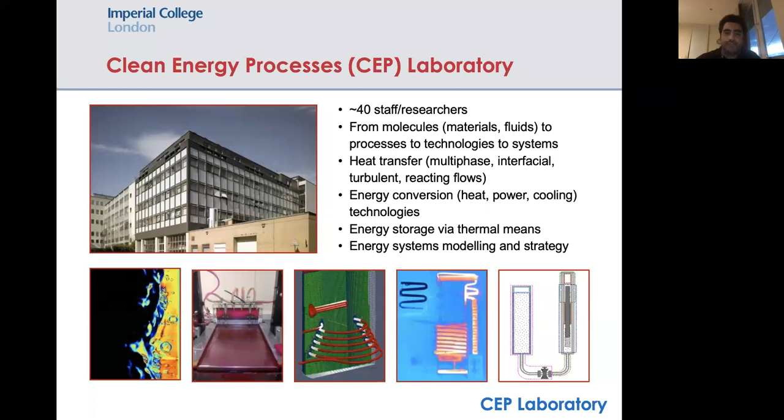So we look at technologies, but their performance is governed by the processes happening within them. You need to understand the fundamentals if you want to design better technologies. And technologies sit inside systems, interfacing with users who want things from them. You can never really understand the true potential of a technology unless you put it in its application and see how it operates within the system. So we need to talk across scales, to people doing fundamentals, and to people looking at policy and how technologies are used by people within systems.

So our group, the CEP laboratory, has a number of divisions, as you can imagine, because we cover a lot of ground. As I said, we go from processes. We have people who look at mass transfer processes and intensification enhancement. We look at multi-phase flows because you have boiling and condensation of different fluids inside the processes we care about, all the way to the energy division, which looks at technologies and systems.

Today I'm really just talking about things happening inside the energy technology part of the group. There are, of course, many other things I don't have time to go into, but that's where this talk sits. So I always start these discussions in solar energy by showing two slides, and I use this term, the cost delusion.

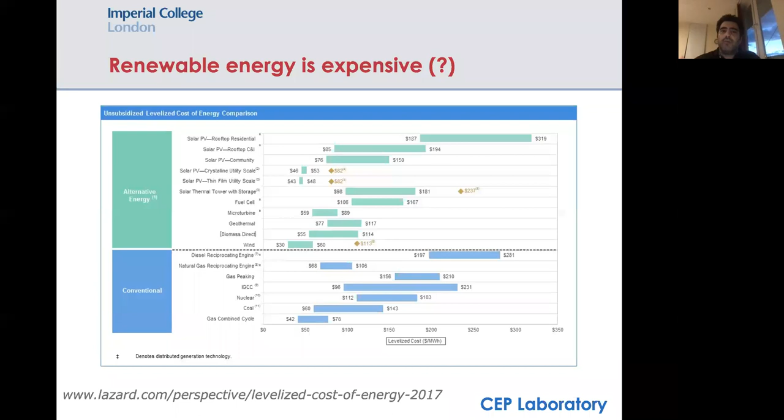And I challenge you to look at the chart and tell me that the green costs are fundamentally much higher than the blue costs. This is no longer true. This is not a true statement, and the evidence is everywhere you look that nowadays the cost of renewables is basically so low that it's competitive with fossil fuel plants. It doesn't mean this is true everywhere, but if you're in the right place, you can see this picture.

Now, it's not that the people saying renewables are expensive are lying — of course they're not lying. It's just that things have changed so quickly.

I don't need to convince you, you just need to look at the plots. That's exactly what explains this seeming contradiction — some people might say renewables are very expensive, and the answer is yes, they were, but not anymore.

Now, when we say solar, what do we mean? There are two types of solar, shown here on the right-hand side. You can have something called concentrated solar power, which is basically mirrors focusing sunlight.

And then you drive a power cycle to generate electricity. The power cycle is a conventional steam power plant, just like you have with coal. And then there's photovoltaics, which is very different. In photovoltaics, you're not boiling anything and running it through a turbine. So these are two very, very different technologies.

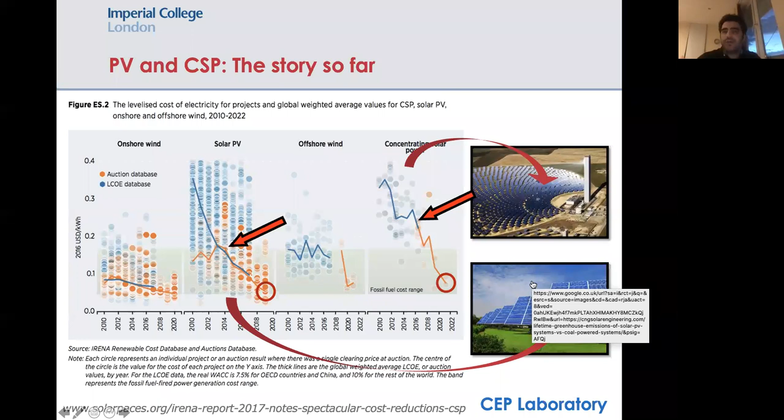Now I want to focus a little on technologies, especially solar technologies. Depending on the concentrating technology, you can have very high temperatures—if you concentrate a lot, you can reach 1,000 degrees. Or you can have very low concentration systems, like a conventional solar thermal system in your home, where you're not generating 1,000 degrees—just maximum 100 degrees to heat up some water. So there's a huge scale of temperatures you can have.

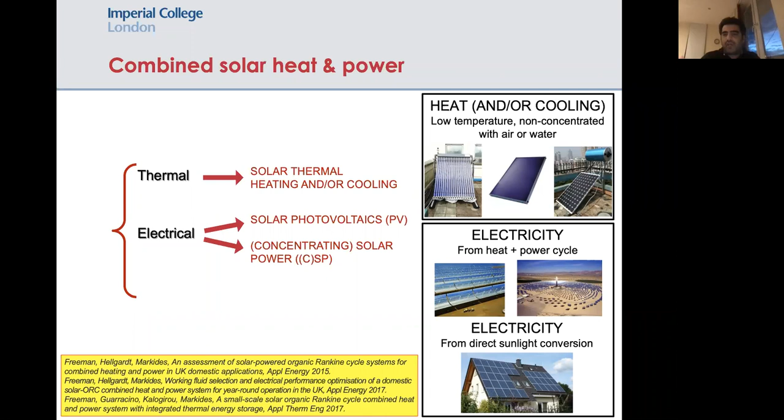But the real question is, can we have a system where these two functions, these two energy vectors, the thermal output and the electrical output, are coming from the same system?

Yes, and there are a number of options. One option is on the top right-hand side, another is on the bottom right-hand side. One option is taking a solar thermal collector like this one, where you can generate heat at a relatively high temperature - by relatively, I don't mean 1,000 degrees, I mean even 100, 200 degrees.

You can use this heat to drive a thermodynamic power cycle, which generates electricity, but it also rejects heat. This is what happens with all power cycles. If you go to any power station, you'll find it has a chimney - well, not really a chimney, there's a separate chimney for exhaust gases, but it has this other cooling tower.

You can see some steam going up - that's the cooling part. You need to cool a power station, so you always reject some heat. So really what you're doing is you have this dual output from the same plant: you can provide heat and you can provide electricity.

But you can also have something called hybrid PV thermal collectors. These hybrid PV thermal collectors are similar to PV collectors, but what you do is extract not just the electricity from the collector, but also some heat. My talk today is really about this - about PVT collectors.

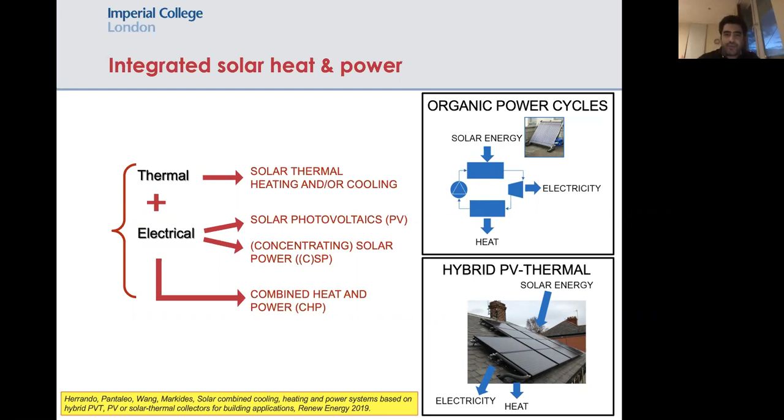Now let's talk about the point of this PVT, not just PV, collectors. One thing you need to know about PV technology is that if you have a cell in an environment on a nice sunny, hot day, that cell is going to get very hot too. If you put something in the sun, it heats up. And we know that the efficiency of PV cells drops as the temperature increases.

So on a really nice sunny day, you put your panel on the roof thinking you're going to get all this power - and you do get a lot of power, but you have a massive loss because it's quickly going to heat up. When the manufacturer rates a panel and says it's X watts, really what they're telling you is how much power it generates at 25 degrees. If you're operating at 65 or 75 degrees instead, which is possible on a very sunny day, you can have a huge loss in efficiency of that panel.

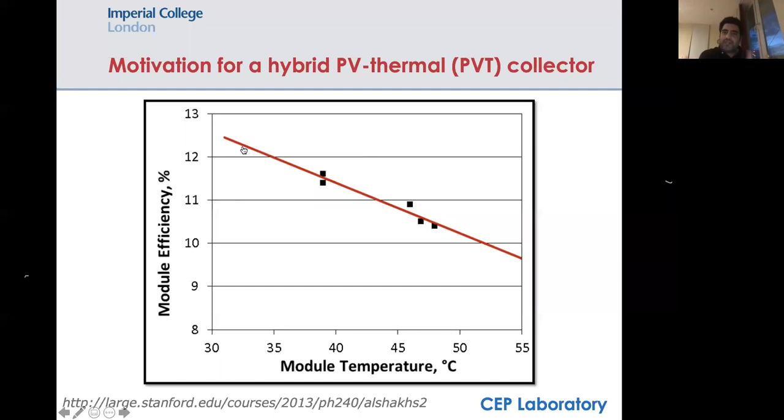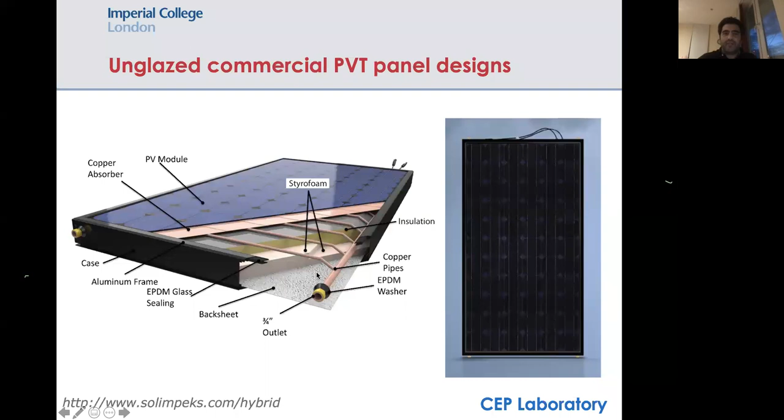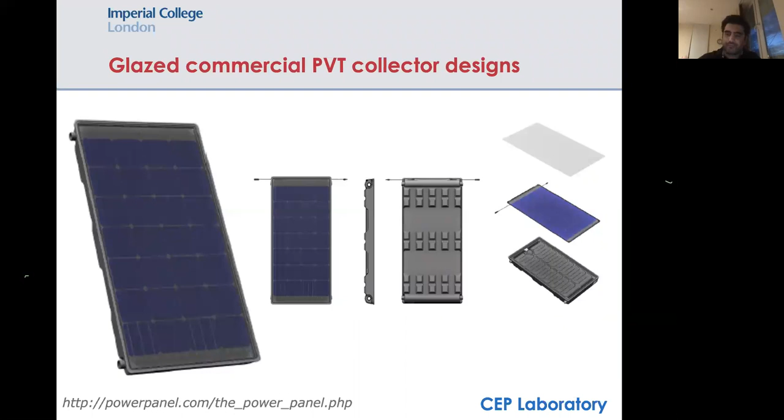It's actually quite simple for me to explain. Effectively what happens is, if you want something which is very good in terms of its thermal performance, you want to try to trap as much heat into the collector as possible. But the more heat you trap, the more you're penalizing your electrical efficiency, because the hotter something gets, the worse its electrical performance is from the PV side. So you always end up with this trade-off where you can't get both. You can't be both thermally good and electrically good.

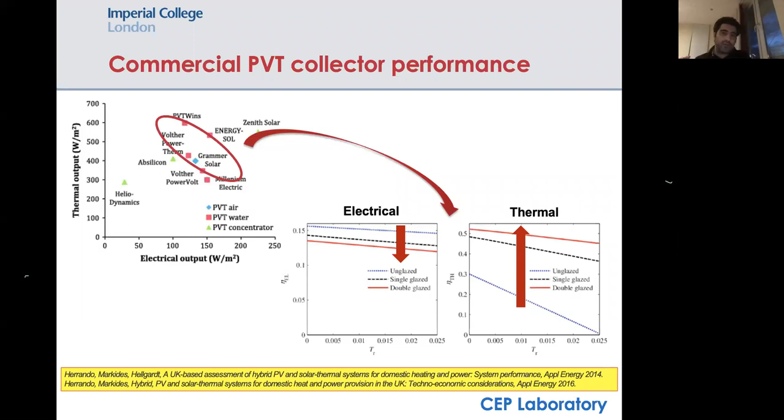You can say, well, okay, I can sacrifice a little bit of my thermal efficiency because I really want to be electrically efficient, or vice versa. You can sacrifice a little bit of my electrical efficiency because I want to be really thermally efficient, but you can't have both. And of course, that begs the question.

What's the point of all of this? With electricity, the temperature doesn't really matter, but with heat, it really does matter. So if you are thermally efficient, what you're able to do is generate high temperatures without losses. So this means that you have a more useful ability to do more things the higher the temperature that you have in your output.

So let's now think about what we've just said: how can we build a high performance collector? In some sense, how can we think about this problem of getting high electrical efficiency and high thermal efficiency? Well, high efficiency really means low loss, because basically the efficiency is the useful output from your collector, which means the less you lose from the collector, the more useful output you're going to have. So we can think about basically minimizing heat losses.

And what are those heat losses? Well, there are two mechanisms of heat transfer in a PVT collector, in fact any collector: one is through radiation, and one is through convection. So you lose heat radiatively, and you can lose heat by convection to the air sitting above your collector. If your collector gets hot, thermal plumes are going to rise and remove heat, and also it's going to radiate heat.

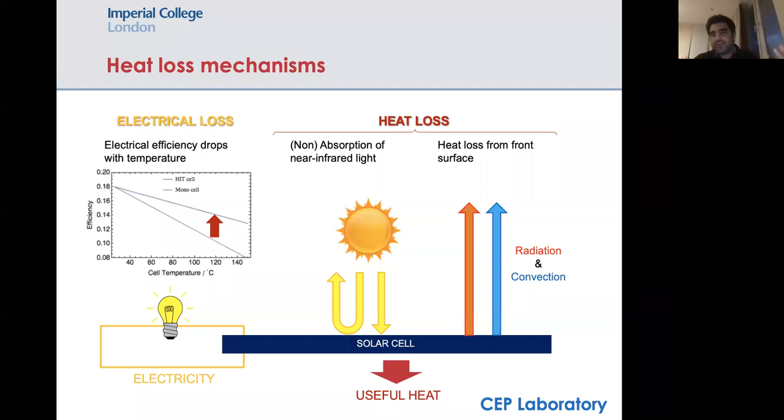And of course, the question then is: if I identify those heat losses, can I reduce them? And if I reduce them, won't my efficiency go up? Yes, of course, that's exactly what we try to do. So we have these two mechanisms, we can lose heat by convection, we can lose heat by radiation. How can we reduce those vectors of lost energy? How can we suppress these heat losses?

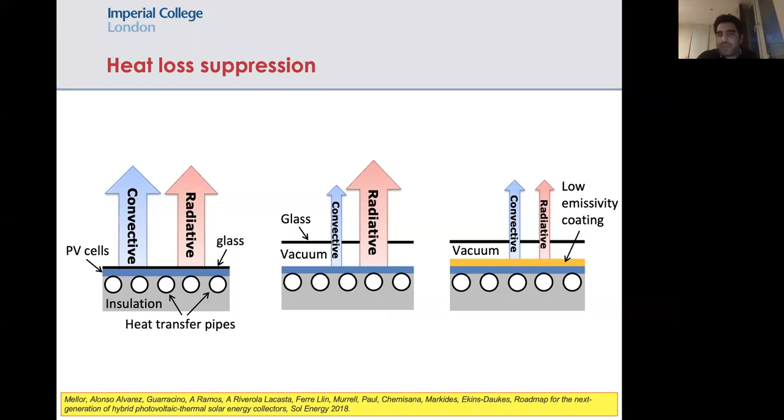Well, of course, you can put a glazing layer here and pull a vacuum. That reduces convective losses, because convection is very weak inside a vacuum. It doesn't cut the radiation down, but it cuts the convection down. And is there anything we can do about radiation? Well, yes, because radiation is a function of the emissivity of a material. So if we find a material or a coating that has a low emissivity, then we can also suppress the radiation from the surface.

And so we've been looking at exactly this: how can we coat PV panels with materials that can suppress losses. It's a little bit more complicated than I said, because in reality, what you want to do is absorb the sunlight and suppress losses, which introduces a bit of complexity in terms of exactly what you're trying to do to the emissivity.

I don't have time to go into the details, but the main lesson from this slide is that if we select a suitable coating, we're able to optimize the radiative performance of our collector and trap as much sunlight as we can, and stop some of the radiation, which allows us to increase the efficiency of the collector.

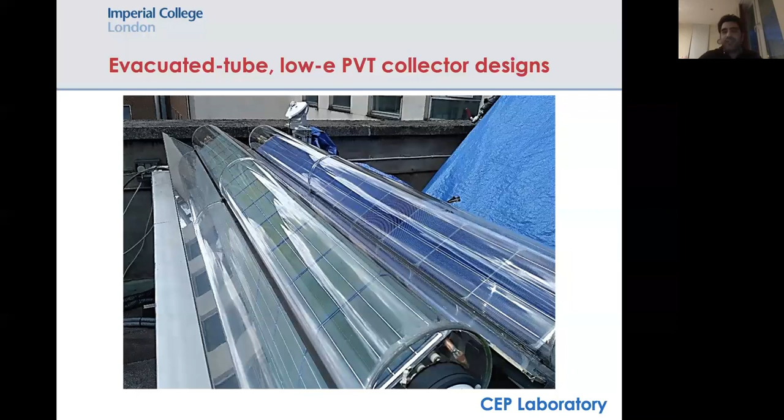That's because on the left, we've added a coating, which is a low emissivity coating, to suppress the radiation from the tube on the left-hand side. So this is a specific engineering design or solution to improving efficiency.

Now, so far I've basically been focusing on collectors which I call conventional collectors, similar to what I showed you before. You have a PV cell, and behind the PV cell you have some kind of fluid, and the fluid is flowing as a coolant, pulling out heat from the cell and reducing the cell's temperature.

But there's another very interesting type of solution, a bit newer than what I described before, called spectral splitting. Spectral splitting relies on the fact that PV cells are not sensitive, so cannot convert all of the sunlight to useful electricity. They can only convert part of it.

And anything higher, what's going to happen to it? Is it not going to be absorbed? Of course it's going to be absorbed. It's going to heat up the cell, but it's not going to be converted to electricity. So the real motivation here is, why would you want to send that part of the sunlight to the cell in the first place? All it's going to do is heat it up.

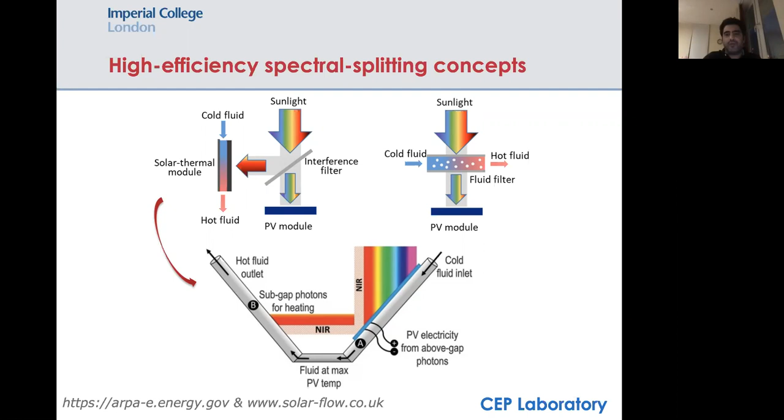So that the not-useful part just gets sent away from the cell to become heat, and only the useful part gets sent to the cell to be converted to electricity. That way we're heating up the cell less. This is one way to generate both electricity and heat with a higher efficiency than if you sent everything to the cell in the first place.

So in terms of technology development, how do we proceed? How do we go from having a nice concept, where maybe we can do this or maybe we can do that, to an actual system where we say this is so much better than something else? Well, we start at the smallest unit. We start from the cell.

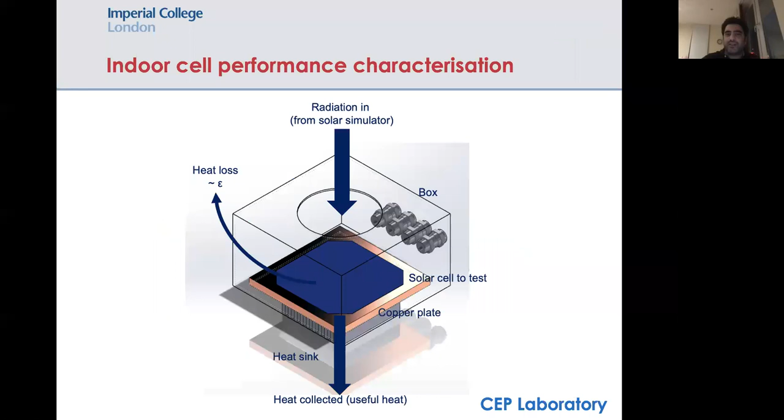We have a cell. Maybe we have an idea about how to coat this cell with a new material, so we can characterize the cell performance itself, and we can say, for example, okay, we can now modify the emissivity of this cell.

We can then take those cells and put them on a PVT collector. Initially, we always do tests indoors in something called a solar simulator. You don't take something and go straight outdoors because there are too many variables. A solar simulator is an instrument that gives you a very well-defined and constant solar spectrum that you can then check your particular design on.

And here we can verify, for example, that we can gain in efficiency without necessarily having electrical losses, so electricity losses.

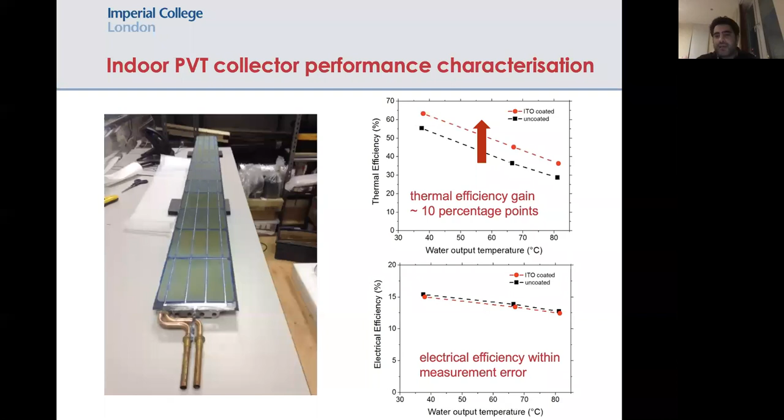Now, in this type of design, you have multiple approaches, and we do both. You attack it from a modeling perspective, so you start modeling things in 3D, dynamic models. We use things like COMSOL and other types of modeling tools to design our collectors and to optimize them. There are different types of designs you can imagine.

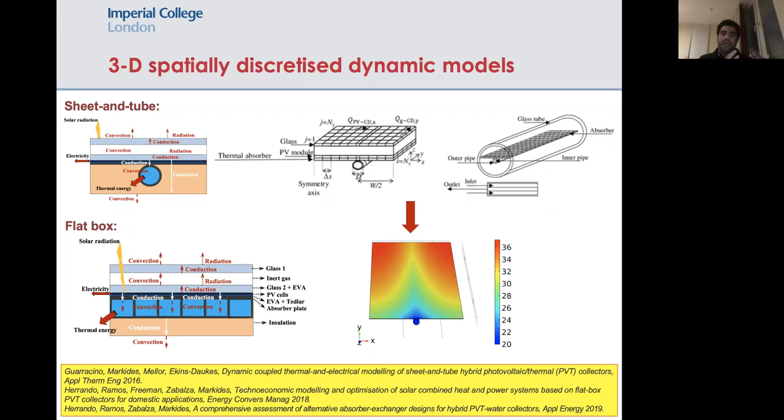This is called a sheet and tube design. This is called a flat box design. There are many, many different types of designs. But what I'm trying to say is, at the collector model, you can model it, number one, and simulate its performance.

And of course, then the final step is you need to go outdoors and do the actual testing. You're never going to convince someone if all you have is modeling, even if it's 3D and dynamic and up and down. We've chosen two particular climates to do tests at.

We have tests in London, which is representative of a northern climate, so small irradiance, low temperatures. And Limassol, which is basically where I come from, not that far away from Saudi Arabia actually. So very hot, sunny, 40, 45 degrees in the summer and quite sunny.

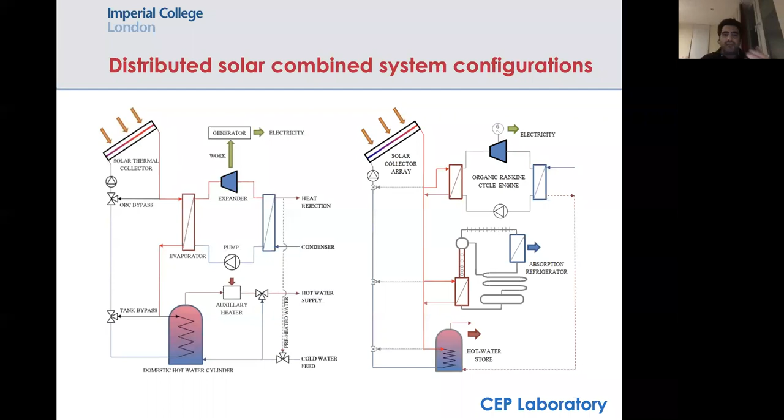This is a bit more of a generic picture. You could have whole control systems, where in some applications the electricity price varies from time to time. So you can have dynamic controllers that store solar energy at a time when the electricity price is cheap, and then as soon as electricity becomes very expensive, you don't want to import it from the grid because you're paying a lot of money. So you delay the generation of electricity to a later time when electricity is expensive. You have all these complicated systems with multiple control issues that respond to the weather, respond to price signals, and ultimately deliver useful energy vectors to some end user.

We've looked at things like, how would you design these systems for different households and different weather conditions? Going to different countries, you don't only have different weather conditions, but different demands for energy. If I go to Finland, they don't need a lot of cooling, but they need space heating. If I go to Saudi Arabia, they don't need a lot of heating, but they need a lot of cooling. So depending on where you are, it's not just the solar irradiance that changes, but also the demands of the end users. So it's interesting to look at how these systems would perform in different climates.

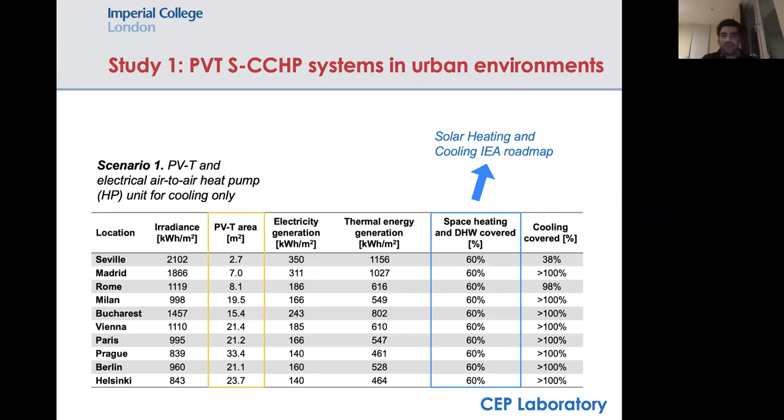We've done a lot of studies. This was a study where we focused on the European Union, going all the way from Helsinki down to Seville — very different weather conditions — trying to find, given a certain fraction of some roof of some household that you fill, what fraction of the energy demand of that household can you cover? So you can cover 60% of this, 30% of that, 100% of the cooling, or whatever.

You can go to slightly bigger systems. You can say, okay, I'm not just interested in homes, but I could go to commercial or larger community systems. Here we have, how can we heat a swimming pool and generate electricity to run the pumps and everything?

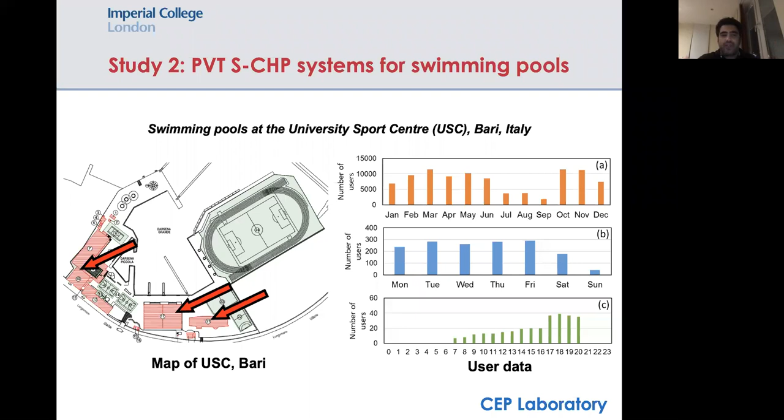In a sports center in Bari, we got the drawings and the energy demands from the sports center, and we tried to figure out, if we cover the available area, what is our capacity to cover the demands for heating and cooling for the indoor swimming pool and outdoor swimming pool, and so on.

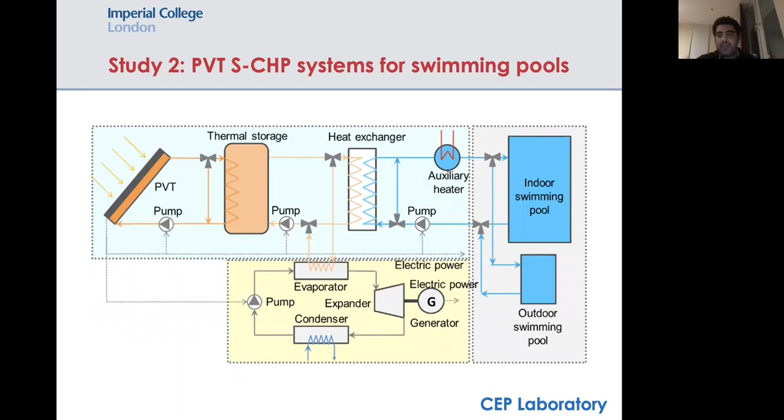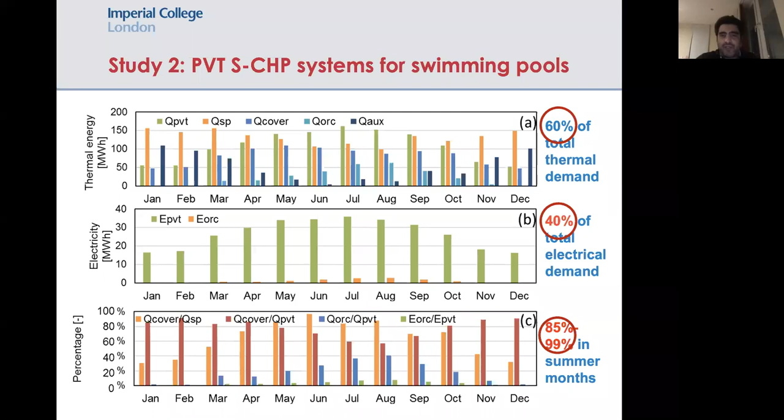You can run simulations over the course of a whole year, time varying simulations, since the weather is changing day to day. You can find, for example, of all the heat I require over the year for my swimming pool, I can cover 60% by installing this system over the available roof space. I can't get any more because I don't have more area available, but I can get less. Equivalently, how much of the electricity that I'm consuming can I cover, and how much of the other vectors, which I don't have time to get into, can I generate from this system?

I spoke very briefly about spectral splitting systems. Study 1 and 2 was really more conventional systems. Here we start asking, what would be the potential of a spectral splitting system in this type of larger scale, semi-industrial application?

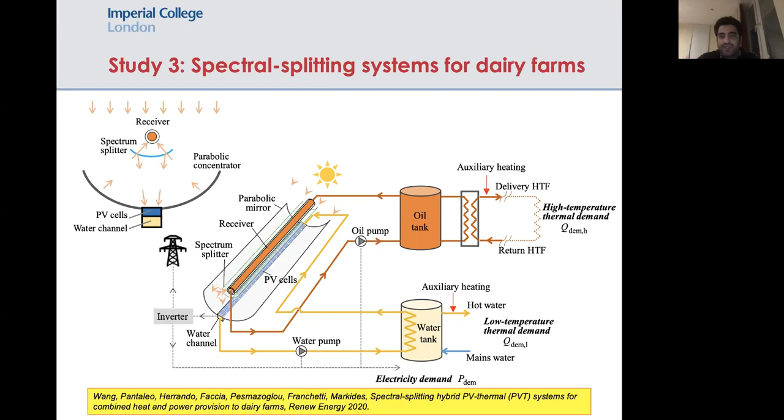Here we have a dairy farm. In dairy farms, there's a lot of demand for medium temperature heat, and of course a lot of electricity as well. So here's us designing a system and trying to say, if you install a certain area in a dairy farm, what fraction of different types of demands can we cover? You can come up with some fraction of the demand for that particular case study we were looking at, and these are significant reductions.

What this really means for an end user is that if you were generating steam, let's say by burning oil, you're now burning 80% less oil. So only 20% of what it was before, and so on, of course at a cost.

So all of this has to come together economically as well, and this is what this is showing. Unfortunately, I don't have time to go into all the details, but I wanted to give you a flavor that we need to consider cost, and there are many different types of cost and economic indicators that we consider.

So here we have something called a payback time, which is how long it takes before this system pays back the investment. You can see that if you design it carefully, and this parameter, which I don't have time to get into, is quite small, then you can have payback times of 12 years. But if something is very expensive, it could go right above 25 years. That's an important economic indicator, payback time.

But there's also something called a levelized cost of energy, and again, you want this levelized cost to be as low as possible.

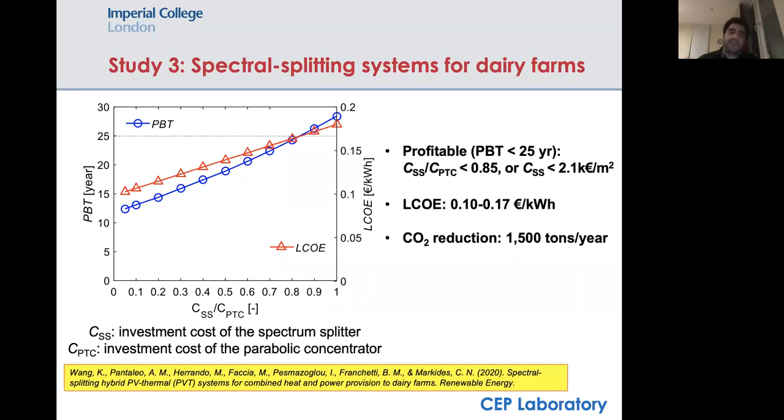We can then have even more complicated systems, just to give you a flavor, because before we were talking about solar energy, but there was only a solar energy input. That's not necessary. You might have a hybrid renewable energy system where you have sunlight, but you also have a wind turbine as part of this grid, and also a biomass boiler, so you can get heat from your biomass boiler. Biomass is a renewable source of heat, and wind and solar are both renewable forms of energy. So you can start balancing the different parts of the system to generate electricity or heat, and this can be many very complicated systems.

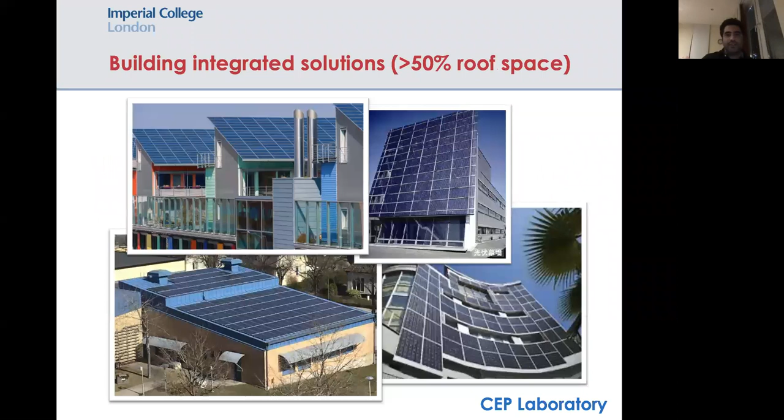Now, we spoke a lot about heat and electricity. I want to talk a little bit about cooling, and a technology we're looking at called the diffusion absorption refrigerator. This is the technology we won the chill challenge with. It's basically a way to go directly from solar energy, from a heat source, to generating a cooling effect. What's interesting is that there's no electricity consumption in the system, so this isn't like a vapor compression system where you have a compressor, an air conditioning system plugged into the grid pulling electricity to generate a cooling effect. This is generating cooling without any access to electricity.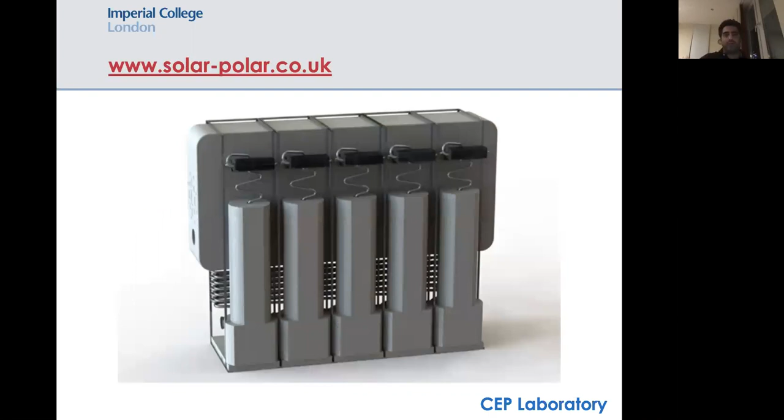You can see it here, what it looks like. We're working with a company called Solar Polar to develop this technology, and it's basically an off-grid cooling system. We're doing tests indoors, you can see here the DAR unit. It generates maybe up to about 100, at the moment maybe 100 to 200 watts of cooling per unit. You can of course put them modular and put a number of them in parallel, and during testing we can test for different conditions, how much cooling you can get, what's the COP, etc.

And here's some outdoor testing that we do. So indoor testing, remember, and then outdoor testing, so we can connect our DAR unit, in this case, to some evacuated tube collectors that supply heat to run this and give a cooling effect.

There are ways, and again I'm not going to go into details, similar to what I did here. Just like there are ways to take the heat generated by a PVT collector and convert that to cooling, there are also ways to take that heat and generate an additional amount of electricity. So if you have a PVT system that's generating electricity, but it's also generating heat, part of that heat can also become additional electricity, a secondary electricity. There are technologies that can generate electricity from lower temperature heat sources.

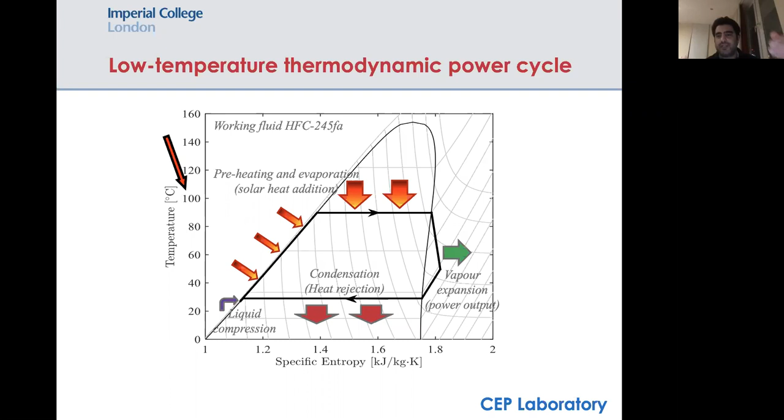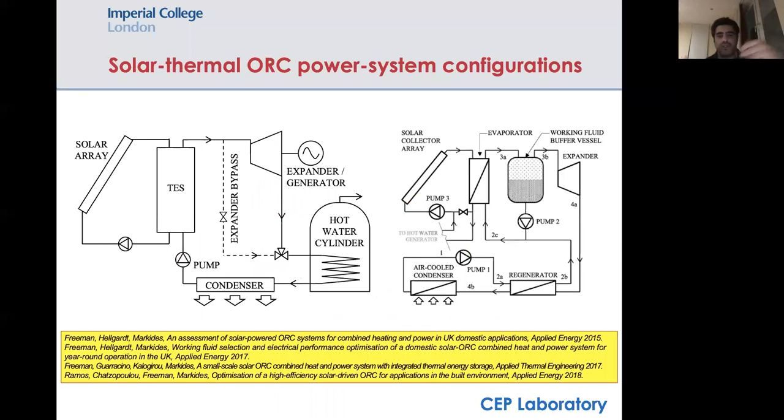There are many types of systems, again with storage, with thermal energy storage, you can connect it, and you can recover some of the heat as well for heat provision. It can get very complicated.

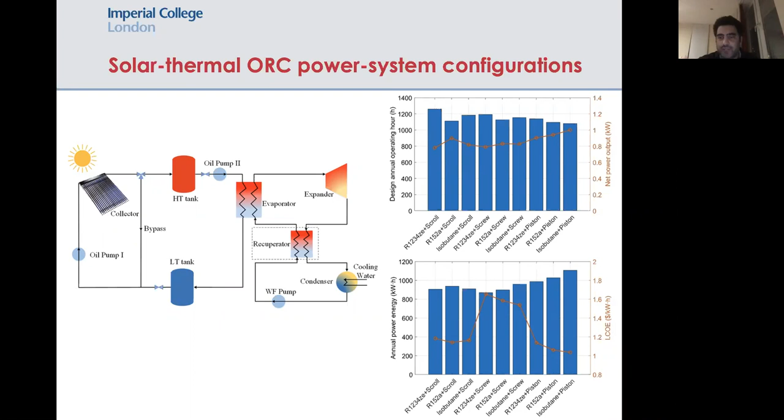There are things called solar ORC systems, where you take the heat from a thermal collector or a PV thermal collector, both have a thermal output, and you convert that to an amount of useful electricity. There's a cost associated with that, and we have to look at all of these things, like what is the potential, given a certain area, to generate some amount of electricity, is that useful, and at what cost does this come?

And of course, the final thing is control. So you don't just have a system that passively responds to the sun - the sun goes up, let's generate electricity, the sun goes down, let's not generate electricity. You can have control by which you have storage. During the day when electricity is cheap, you might want to be storing something. So you see what's happening here - this is our store and the energy that's being stored.

And during the day, we're storing the energy. And then at 5 p.m. - you know how the British love to have a cup of tea at 5 o'clock - everybody switches on the kettle at the same time. And what happens is that because everybody wants electricity at the same time, the price of electricity goes up.

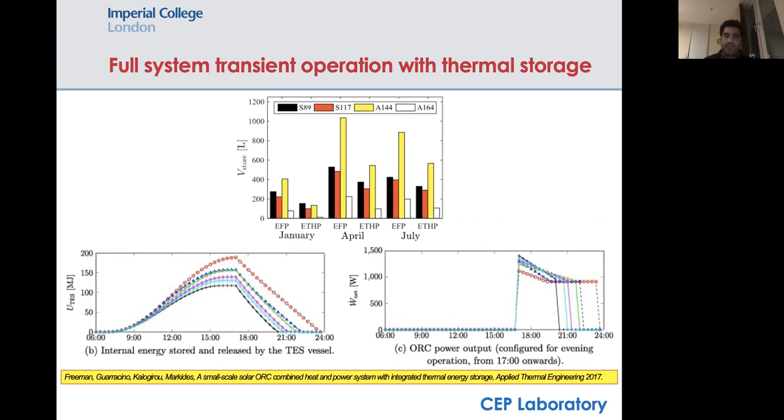So what we're doing here in this household, modeled in the UK climate with a solar ORC system, is we store energy, and instead of buying electricity from the grid at 5 p.m., we basically discharge our store starting at 5 p.m., and it goes until about 9, 10, or 11. It depends on the size of the store and the material and how much storage capacity you have. But the point is you discharge it at the time of day that you want. So you can play all of these games with controlling the system, using the energy at the point and time that you need it.

I'm going to skip that. This is the efficiency with which you can convert sunlight to electricity with a solar ORC system - it's basically between 5 and 6%. It might sound low relative to PV, where you'd get something like 3 times this. It might sound low, but actually this is also a little bit cheaper than PV, so there's that sort of competition there.

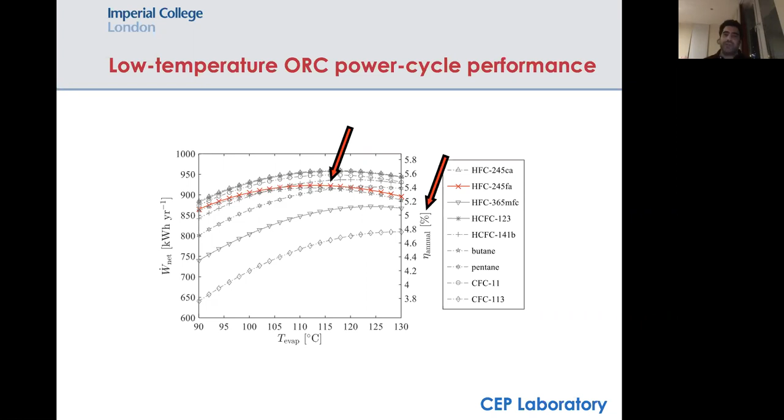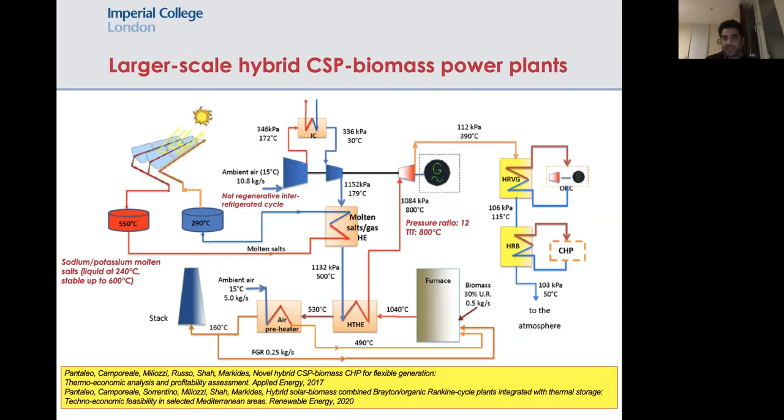There are also larger scale systems. My talk isn't really about this, but I wanted us to keep in the back of our minds that just because we said let's focus on small scale systems in people's homes, it doesn't mean you can't apply them in huge power stations - you can do it. And again, you have issues about cost, what's the best configuration and technology, optimizing the system, and what's the best way to operate and control it. All of these things exist in the large scale systems too, just like in the small scale systems we discussed. I just don't have time to go into that today.

So I have, I think, 2 or 3 slides left, which are just some very quick comments about what we're working on at the moment. I mentioned that we have a personal interest through a spin-out company in PVT technology - PVT collectors. We're specifically looking at a number of different concepts, one of which is based on something called transparent photovoltaic.

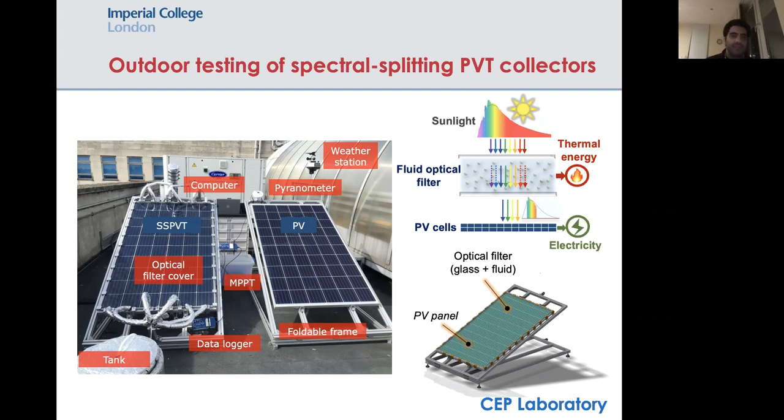I think I'll end it there. Again, these are results from the roof showing that relative to a PV panel, you can get in some cases the same electrical efficiency plus some heat, if you design the collector carefully.

So that's it from me. I didn't leave 10 minutes, I lied—I left 6 minutes. But I hope I gave you a flavor of how we attack technology development, from the very small component to the collector to the whole system, how we optimize the operation of the system, the control, the testing—outdoor, indoor, modeling—all of the complexity and things you need to think about, the right materials, the right cells.

And all of the things you could be doing with solar technology. This is basically looking for technologies that are going to be available not now, but maybe in 5 years, in 10 years. I really look forward to any questions you have, or I'll be happy to discuss any of it with you. Thank you for your attention.

Thank you very much, thank you Professor Markides. That was really a very nice presentation, appreciate it, very interesting.

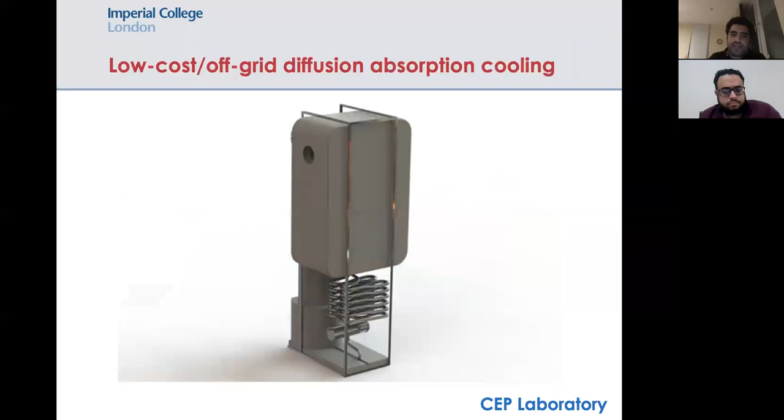Did you compare that? I did, maybe I missed when I covered that in the last portion of the lecture. Yes, okay, so that's a good point. In fact, I'm going to start from a slide I had right at the beginning, and I'm going to say something quickly, and then jump back to these last slides that I have. But so you're right, yeah.

There are different approaches to this problem. In my opinion, the approach should not simply focus on performance. It's not simply about I'm 10% and you're 12%, but it has to be I'm 10% at this cost and you're 12% at this other cost. Now let's look at the numbers and see which one is better. You can't really do this analysis fully without accounting for the costs.

In the work that we do, there's usually a step: first you look at what's the technical performance of a system, then you understand the technical potential, and then, okay, what's the economic potential of the system? And then you iterate a little bit. Can I improve the economic potential of the system by making changes to the technical performance, or reducing some cost of some component? So all of these things are done.

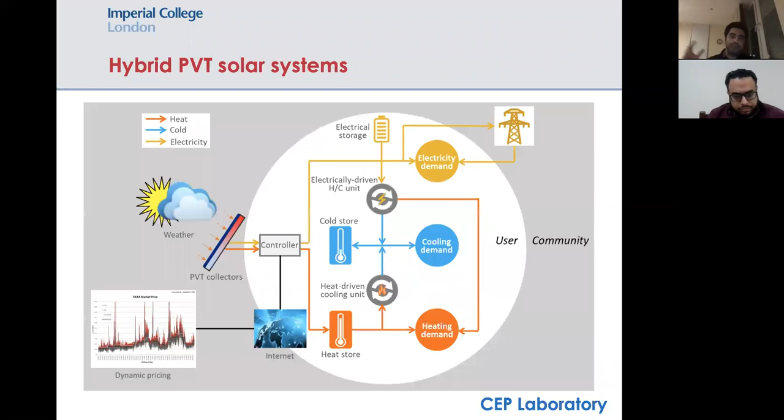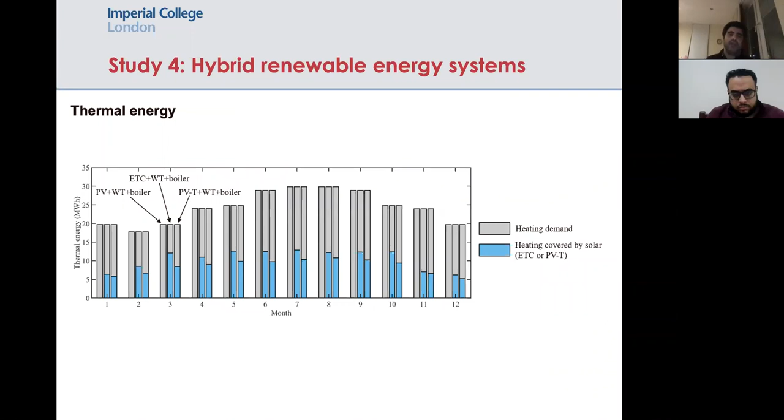In some of the results I was showing, where I was comparing PV-based systems with PVT-based systems, there was a cost down as well. Let me show you, for example, right here - a hybrid system, quite complicated, that involves PV driving heat pumps to get heat, cooling, whatever, with PVT. Of course you're going to find that with PV systems you have more electricity. This is a conventional PVT, not spectral splitting - you have a bit more electricity but less heat.

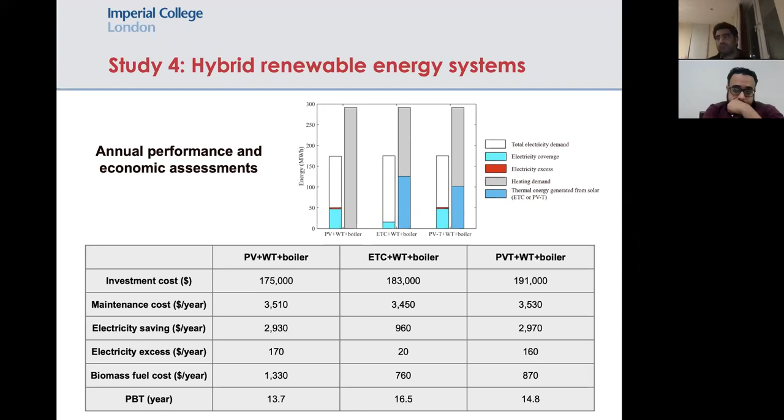Can I have a follow-up question? Why don't you use thermoelectric materials that convert heat to electricity instead of going through water and a lot of steps? I can tell you the answer to that - there are two answers. The first is you can, there's nothing that stops you. Again, this is all going to boil down to economics.

I doubt it. My opinion is there is a role for everything, but for this particular application, if you focus on the low temperatures, thermoelectric generators are not, in terms of their performance, yet what you can do with conventional cycle technology. By the way, I should say that shouldn't discourage us - it really just means, okay, let's invest more money and make thermoelectric generators better and better. And then one day what I said won't be true, and great, then it will be replaced by something else. No problem, great.

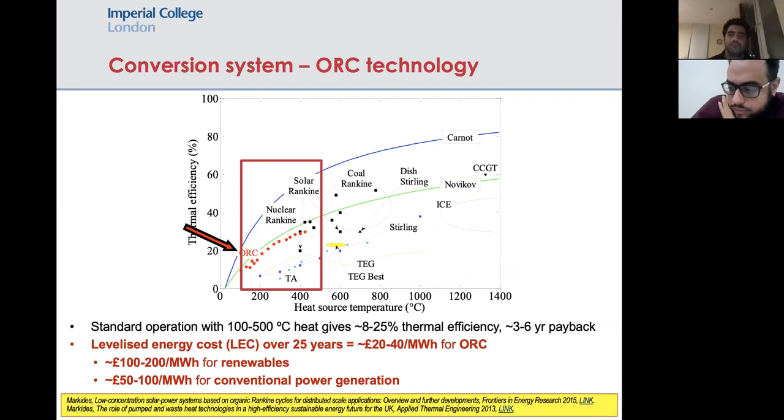For your presentation, Dr. Christos, I'm very much interested in the outcome of the experimentation that you talked about in your latest slides. So I hope to read about it or to reach that source of comparison study - it's very interesting. Now, my focus or my question is about your methods dealing with bifacial technology.

So it's a very good question, and the honest answer is no, we haven't looked at it yet. We've been studying—so by bifacial, I suspect you mean cells, right? Bifacial cells, yes. It hasn't, in my knowledge, yet been used in the context of PVT collector technology.

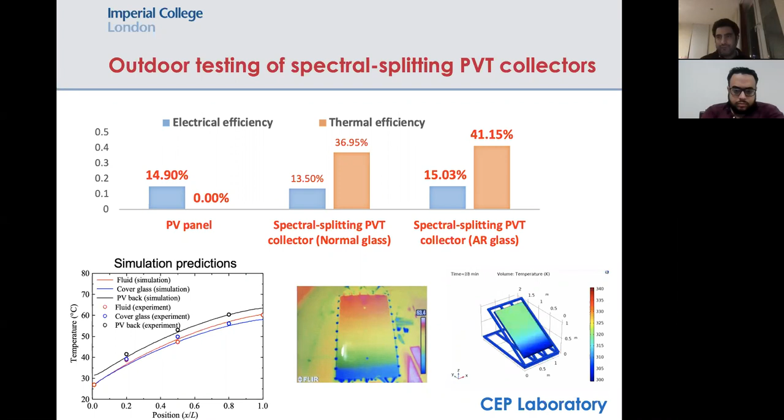Yeah, it's the same flavor of what you're describing, and I think you have a very good point that it would be interesting to have a look at that in this context. Thank you for the comment, it's very useful.

I just want to add one thing here. In the area where we live in the Arabian Peninsula, we have two major issues: the heat and the dust. Both of them hinder the performance of PV systems overall.

Correct. So anything that could help in actually upgrading performance or gaining energy, but specifically if it does really go in alignment with the economy.

Thank you very much, I want to say thank you. I really like that comment, because it comes from someone with a practical point, which is that it doesn't matter how much theoretically you think your efficiency is—if it doesn't solve real world problems, it's never going to be implemented, or it's going to fall short of expectations. And I'll say one more thing: we know this, and we have some ideas about what you could be doing.

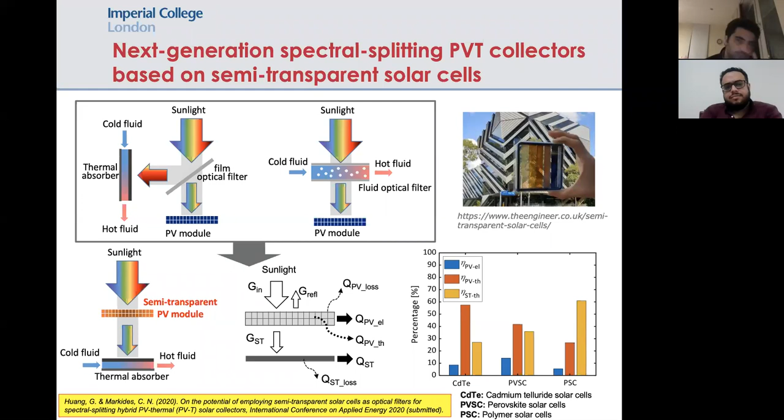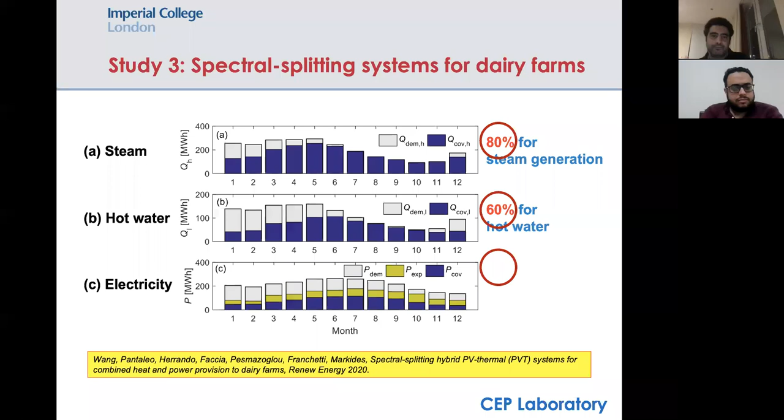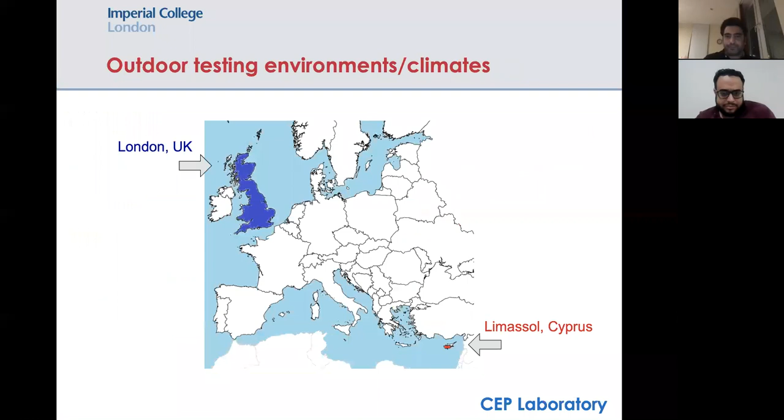Let me just say one small thing very quickly. You'll note that some of the PVT collectors I mentioned—this is another company's product, not us—if you look at something like this tube, the concept is maybe you wouldn't expect the same problems as you would with a flat panel in terms of dust cycle.

So we don't know yet, because no one's tested them. These are very fresh technologies. We don't have years and years of experience in the field to tell you how much it drops because of this and that. But let me just tell you it's not something we're ignoring—we're aware of these problems, we know it's a massive issue, and we're trying to think of solutions.

Any ideas, right? I mean, I would love to discuss it with you later or by email or whatever. Thank you. Thanks. Thank you.

Okay, Hussein, Wahid. Yes, first of all, thank you for your very enlightening and informative exploration.

My question is related to using solar energy for domestic use in Saudi Arabia, where we have high radiation, and along with that available hot water temperature nearly 45 degrees. So we actually need to cool that also. But what do you think is the best configuration to get cooling as well as electricity for such environment and hot weather?

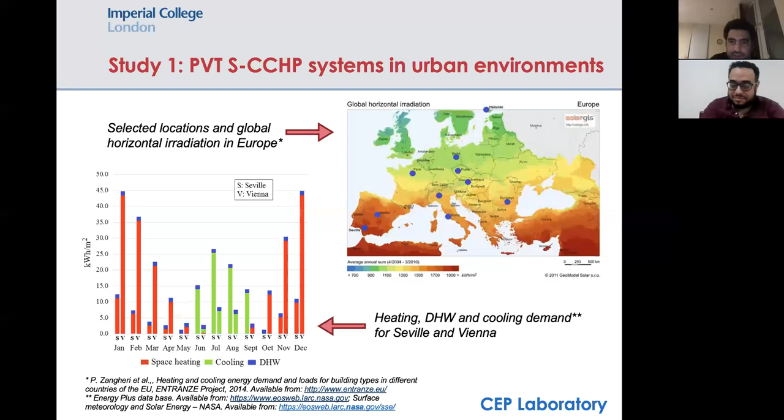So we looked at different types of PVT configurations to see what's best. It's a little bit variable, right? And you can have multiple types of solutions for cooling delivery, which I think is really what you're saying. On the cooling side, you can either have something driven by electricity—a so-called vapor compression system, like a heat pump but running in reverse for cooling—or it can be thermally driven.

So I showed you one example of a diffusion absorption system, but there are also just conventional absorption chillers that you can buy. We've done a lot of different tests for the different technologies. In very hot climates, absorption systems become interesting because there's so much heat generated that you don't need, so converting that heat to a useful cooling effect becomes more and more promising the hotter the climate gets. The optimal system switches from something electrically driven to something thermally driven, the hotter you get.

In Saudi Arabia, I can't tell you because we haven't looked at it, but I'd love to. I hope the project we're submitting with KFUPM for funding gets funded, because the whole point is to look not just at the panel itself, but ultimately what the panel is doing there—it's there to cover our needs. So what can we generate from that panel? How much cooling can we generate? Part of that can only be answered once you know the right configuration.

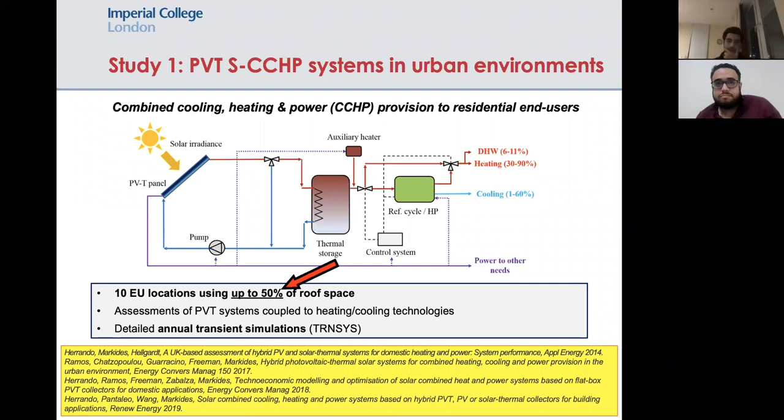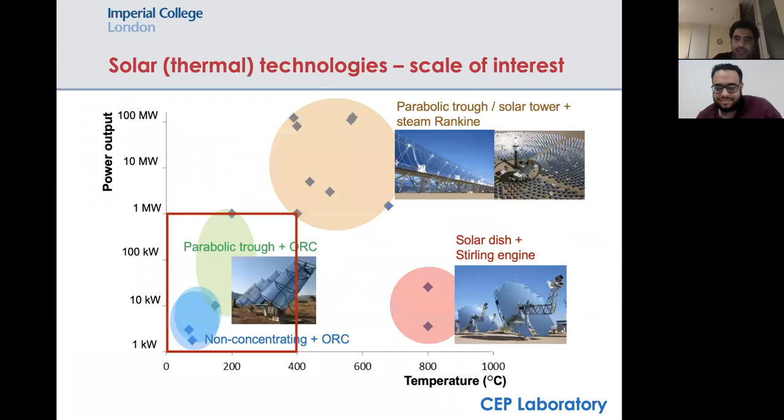Oh, what a good question. You don't make it easy for me, do you? But anyway, thanks for the question. I'm going to go out on a limb here—I'm not an expert in everything, but I'll give you my own view of this.

I don't think the cost has gone up 20% because the core technology cost itself has gone up 20%, but due to safety restrictions being stricter, decommissioning costs going up, and being more strict about what happens over the lifetime of a power station than in the past—this basically compounds the cost. But I'm just speculating here, and I'd personally be interested in reading about this if anyone has looked into it.

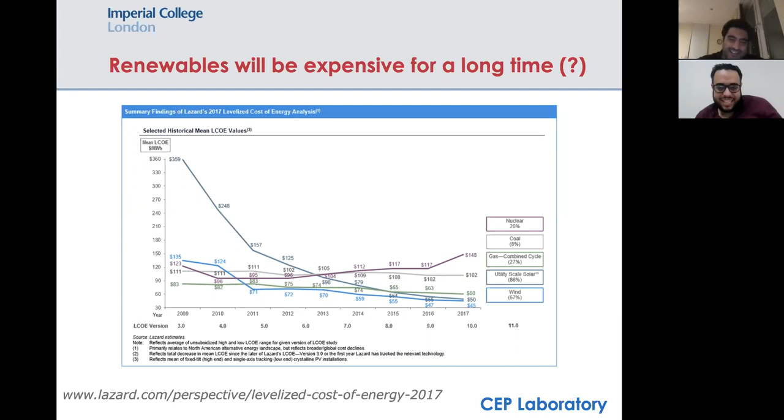Yeah, please, I mean my email is the same as you remember it, right? What's it been, 6-7 years? I don't know, it's a long time ago. Goodness, it's been a while, but thank you. Thank you kindly, thanks a lot. Interesting question, thank you, Chris. My pleasure.

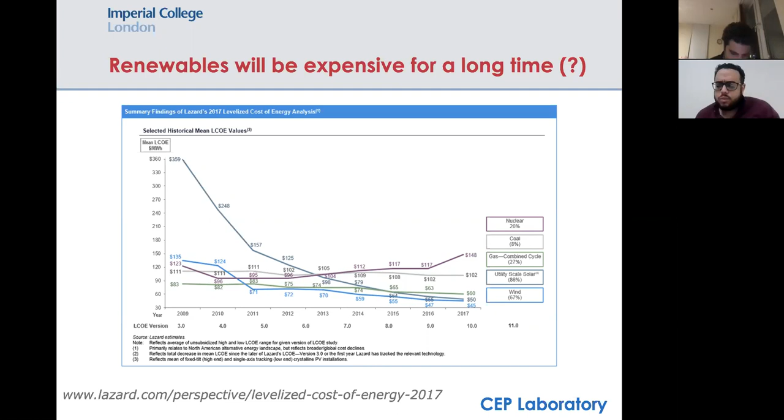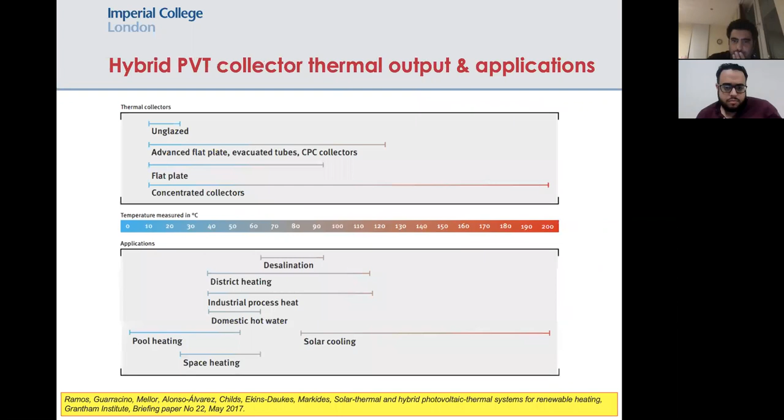So my couple of questions are: you showed a figure comparing the efficiency of the solar panels, the photovoltaic and the photovoltaic thermal ones. There was around a 40% reduction in the efficiency of the PV after you added the low emissivity. Okay, so basically the efficiency of the PV went down from around 20%, which is usually the number we would get, down to like 11 or 12%.

Take into account that with time, this 11 to 12% will actually decrease more. So the question here is, if we used this thermal energy with an ORC to generate power, and the ORC has, like you indicated, around 5 to 6% electrical efficiency, will that make up for the big loss in electricity?

Yeah, good question. So maybe I should leave that for you. Okay, I'll take that one, and then you can jump in and ask yourself. But I like the way you're thinking, because these are exactly the things we're looking at from a technical perspective, right, this drop.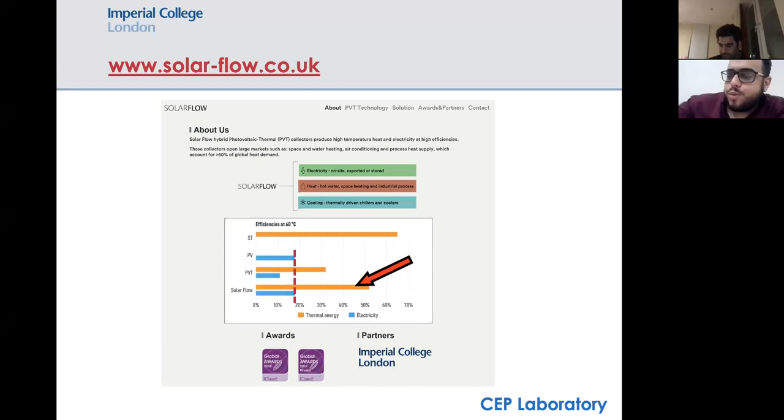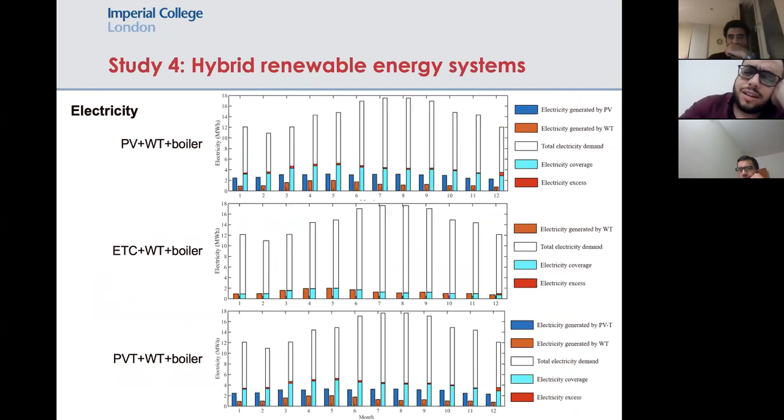My second question is about the diffusion absorption refrigeration - that was actually so interesting. I just realized that you had hydrogen in the system. Yes, with ammonia and water. Let me see, where did I show it?

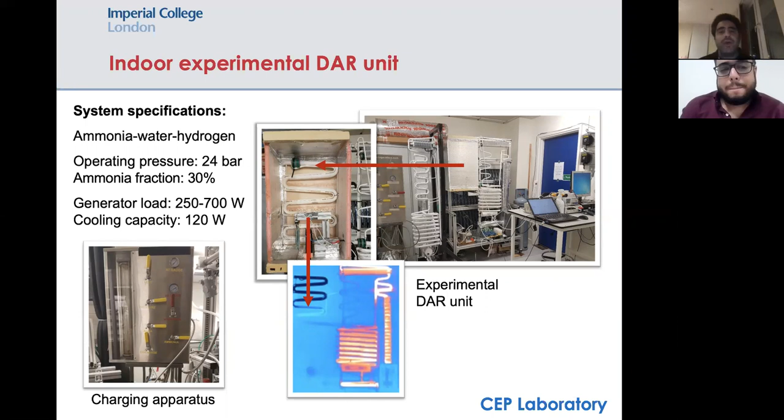Did you try these systems with hydrogen systems, like with water splitting? No, I mean in general the PV thermal - did you try incorporating these into water splitting systems for hydrogen? Oh, you mean to integrate this with the PVT? No, not yet. We've tried them, but we've been mainly driving them with conventional solar collectors, not PVT collectors - these are conventional solar thermal collectors. There's a challenge in driving these with PVT collectors, but I think that's what we're heading for. So we have one technology being developed separately - let's call it solar cooling, based on the DAR - and another technology about the collection of sunlight, which is the PVT. The point of what we're discussing is maybe soon we'll be able to integrate the two, so instead of having conventional vacuum tube solar collectors, you'll have a PVT collector, plus the electricity.